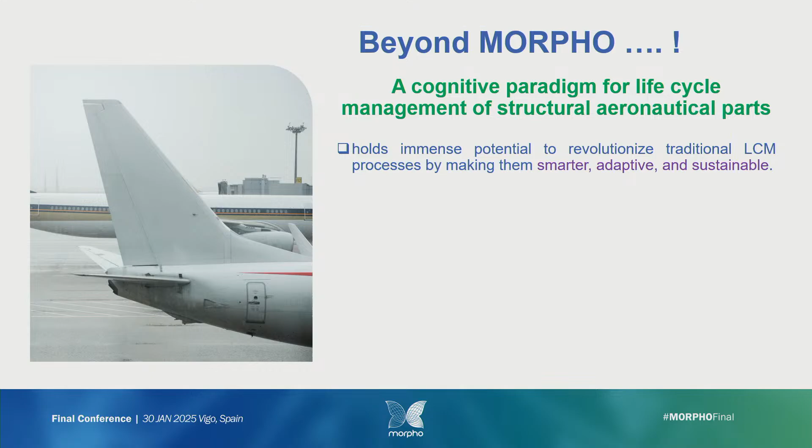So it's to go through a cognitive paradigm for life cycle management. Here it's dedicated to aeronautical parts, but can be generalized to all structures, typically all the composite structures. So why? It holds immense potential to go smarter, adaptive, and sustainable.

Digital transformation, specifically in aeronautics, is coming, and it's now. So there can be this approach of cognitive LCM, which provides strategic advantage by enabling systems to think, learn, and improve. It takes advantage of extraordinary sensors.

High-end computing power, increasing, offers transformative potential for aeronautics, for sustainability and efficiency, safety, and can achieve breakthroughs in environmental impact and cost effectiveness. This is linked to this approach.

So what is the advantage of that? What is the cognitive paradigm? It's a framework that integrates cognitive process, data-driven, and adaptive learning. It supposes the availability of aircraft sensors, data, and simulation. This is what we did in Morpho, what we are doing in lots of projects here, but it's a generalization that we're trying to bridge to the industry.

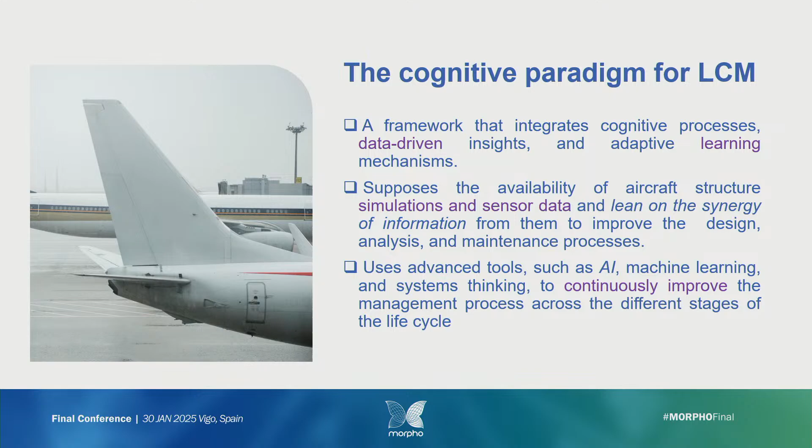Use advanced tools like AI now, machine learning, that will make the system think by itself, continuously improving the management of the process across the whole life cycle.

So some advantages: safety, it's evident. If you have something that thinks by itself, we can do some RUL estimation online, so we can be proactive, reducing the risk.

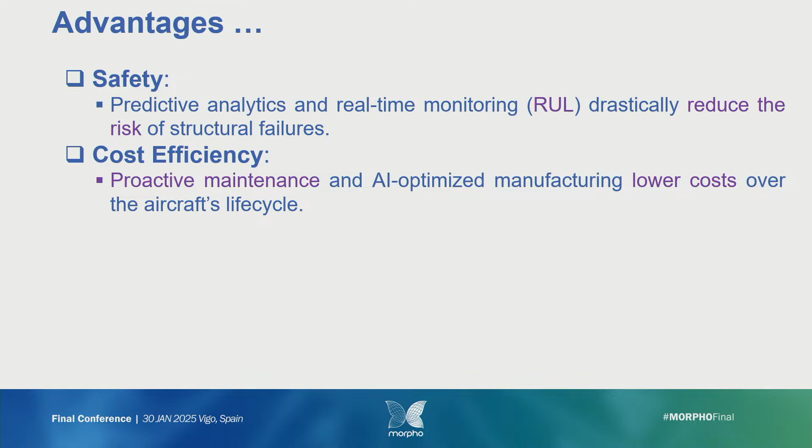Cost efficiency, for example SAFRAN: proactive maintenance, so less shutdown of the structures, so lower cost over the aircraft life cycle. Sustainability, of course, improving recyclability and life cycle feedback, minimizing environmental impact. And innovation: with AI we will accelerate the conception, the development, and improve reliability.

So I'm not going to try to convince you, as I said, because you are convinced about that. So some challenges: sensor integration is still a challenging issue. We did something here with Morpho, but it still needs more projects, more effort from scientists and also from industry to bridge what we did in labs to higher TRL.

Why? Because this is... okay.

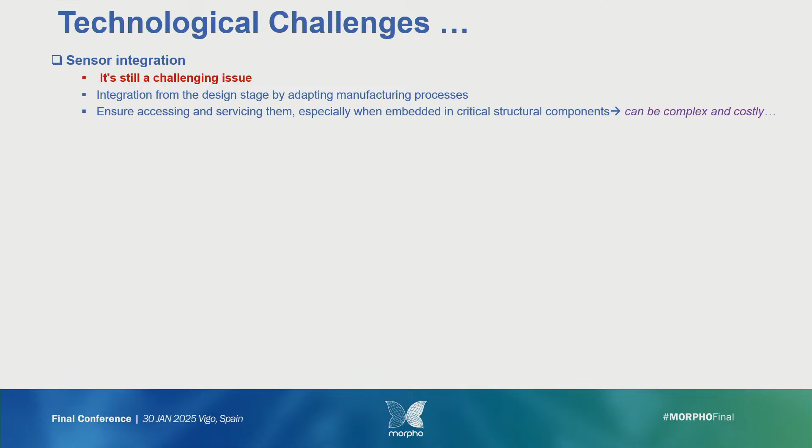So it's still a challenge. And then we have data integration and assimilation. I think we have some colleagues here that work on that. It's really a hotspot to do assimilation, how we can have all this data coming from different sources and how we can mitigate them, fuse them. Because you measure different data coming from different types of sensors, and you have the simulation one too, so you have to merge everything. It's really a challenging issue scientifically, with different methods needed to do that.

AI is now, we live with AI now. We cannot do something without taking into account all this power coming from AI. But relying on machine learning models, they may be prone to inaccuracy if trained insufficiently. So we need data, we need a lot of data. A prediction of some rare events can require expensive computational efforts.

Digital twin complexity: the digital twin is a word that we all like, but when the system is completely complex, it's not easy to have a digital twin that takes into account all the parameters, all the environment, and it requires really intensive resources. So simulating dynamic loads, material degradation, environmental effects in real time, it's not easy. We don't know how to do it now for some really complex structures or environments.

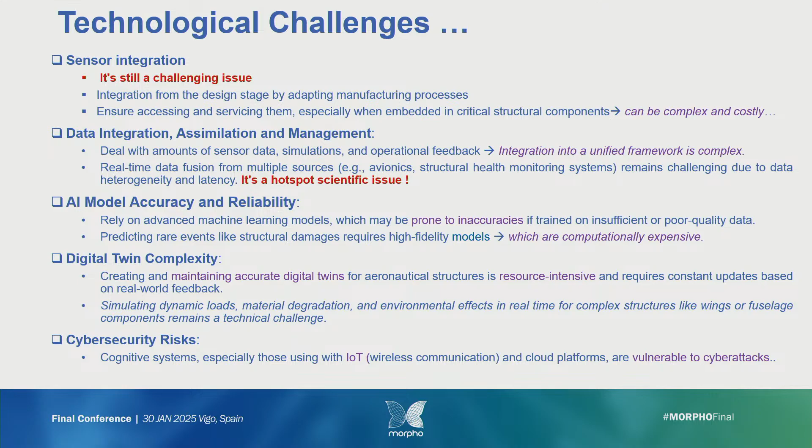Or you have to consider that wireless communication is a question of frequency bandwidth. Some are restricted, so yes, and it doesn't have to disturb other aircraft communication. That's also for cybersecurity risk and attacks. Okay, now some operational issues or challenges: we have the implementation cost, which needs significant investment and infrastructure from the aeronautical industry.

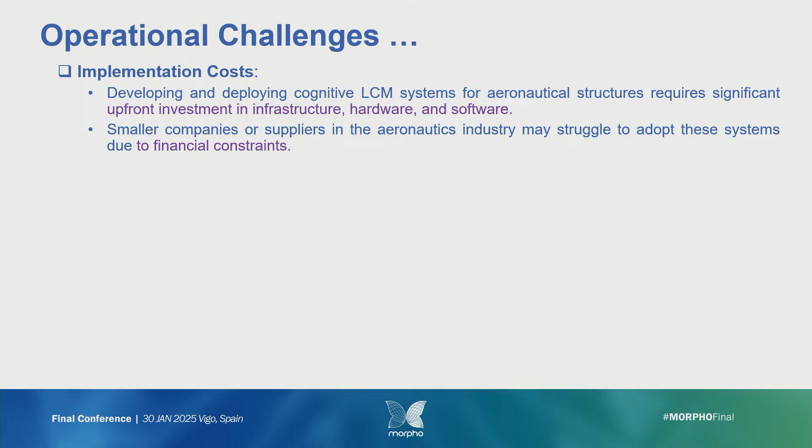It's not something that you can plug and play. It needs really hardware and software investments. It can be an issue for some smaller companies because you need this financial constraint. They can face this financial constraint and then block the system.

You have also the system maintenance and scalability. Cognitive systems require ongoing maintenance, update and scalability to handle increasing data volume. You need also to adapt the system to different aircraft, and this is not a generic way. You cannot adapt as you want, even if theoretically we can say we do some approach based on hybrid twin,

we can then transfer it to everything, but it's not the case, it's not easy. Interoperability with legacy systems. We say that we can exchange data, but in some industries there is sensitive data, and there is no data exchange. We say that data are the business, not data exchange. So this can make some constraints on this kind of approach.

Also issues from certification challenges, which is really a big challenge. We have EASA with us today, with Elena, so it's something that EASA is working on. It's not easy to certify for aeronautical parts all these technologies. So adding AI-driven approach, it's more complicated to certify. You will have really a challenge to go through this certification for AI-driven systems.

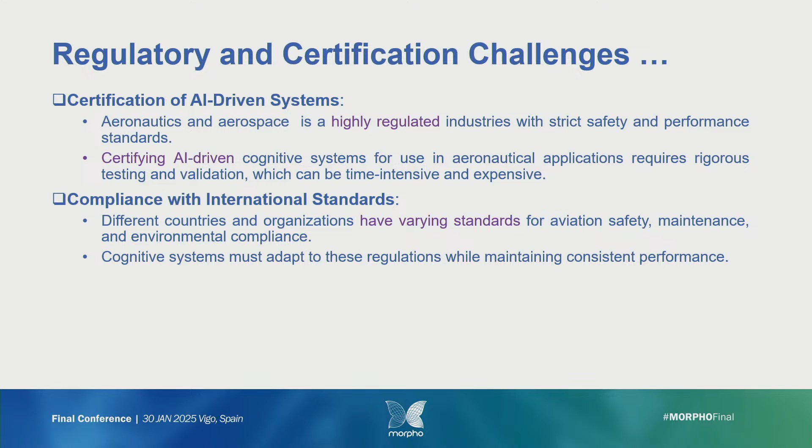Compliance with international standards - I think EASA is working on that with some others, like Aerospace Federation, to have some standards. But we don't have common standards now, until now. So when we will add AI, it will be another problem. And also the responsibility - who is responsible if there is any problem.

And one of the issues is human. We speak about AI, but it's human. It's really the challenge we have to trust in AI when it's embedded in the aeronautical part.

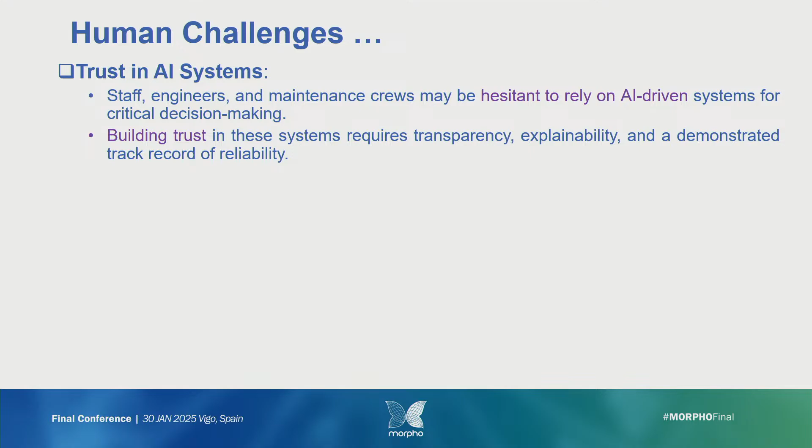We have also to skill the gaps, because implementation of management cognitive systems is specialized. You need more specialized engineering, researchers, and PhD students, stuff like that. It is not the case now. You have to go through this whole transformation of skills to take into account all this technology that goes around this cognitive approach, and human collaboration between human and cognitive system.

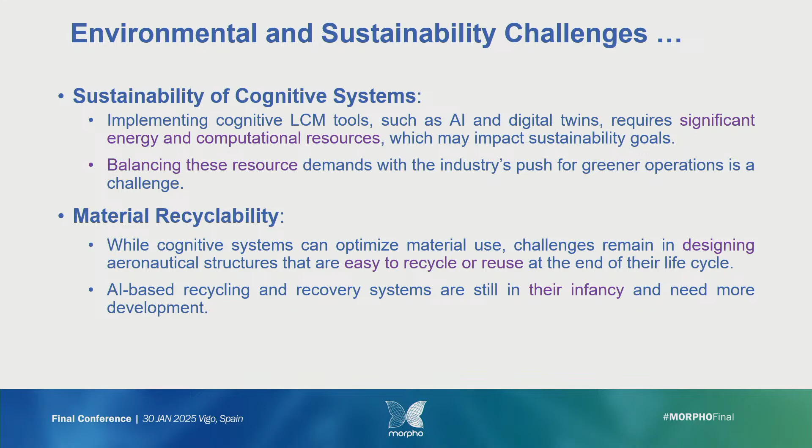And the last part is also on environmental and sustainability challenges. I think we all agree on this, because you have to do a balance between the computational efforts that we need for these hybrid twins, this digital approach, the cognitive approach, and the environmental impacts of it. You know, when we ask ChatGPT, you need a lot of energy. So it's something we have to be aware of. We cannot do what we want without balancing this resource.

And the recyclability of materials - we have to think about that from the beginning, from the conception, from the design, to have something that's easy to recycle, to reuse.

And at last, ethical and social issues. This is general stuff about AI models, not specific to aeronautics. And the change in jobs, manual roles, reduced demand for certain manual roles, stuff like that. It's too tricky to do all this. We are in our lab doing a lot of high-tech stuff, but in reality, if you want to go to industry, you have to take care about all that.

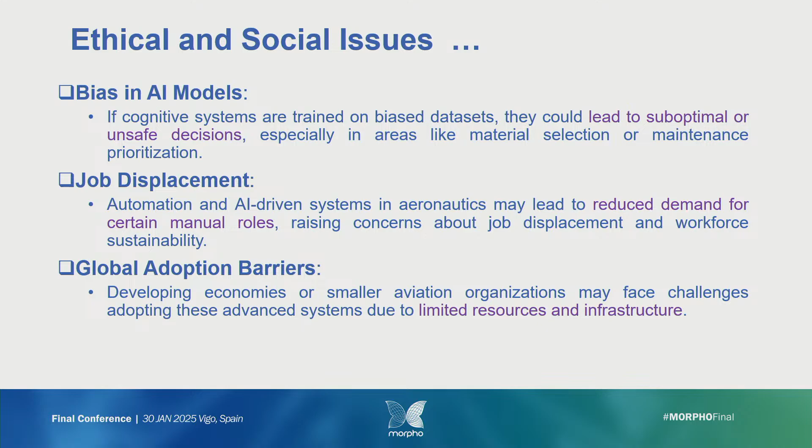So, to overcome this, we can think about what we are doing here in Morpho and some projects here, to sensorize from the beginning. Really, what we put, some sensors inside and on the structure. We have to do it from the beginning. We have to design new structures that integrate new materials.

You have new materials that have some properties without adding sensors. You know, you have new materials. Lots of work is being done now with some new materials that offer sensitive sensorization natively that can help with this paradigm.

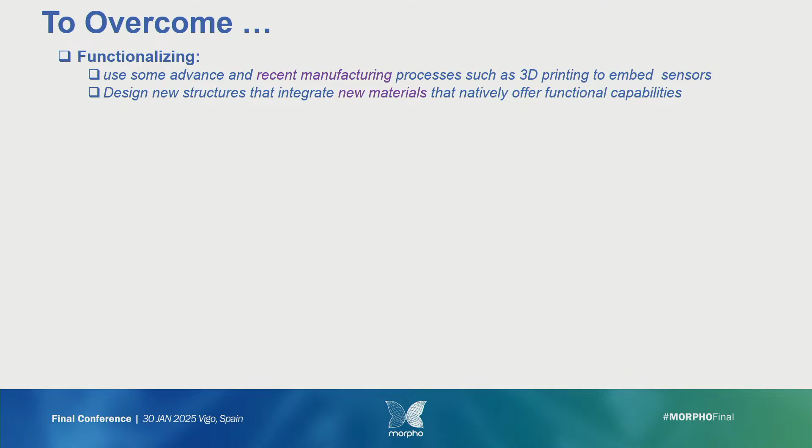Data and standardization. Advanced simulation testing. Invest in high fidelity simulation. It's vast, and it's not easy also, but incorporate some explainable AI to ease understanding of what's coming from this technology, and workforce development - develop specialized training programs and upskilling for the staff, and at the end, collaboration.

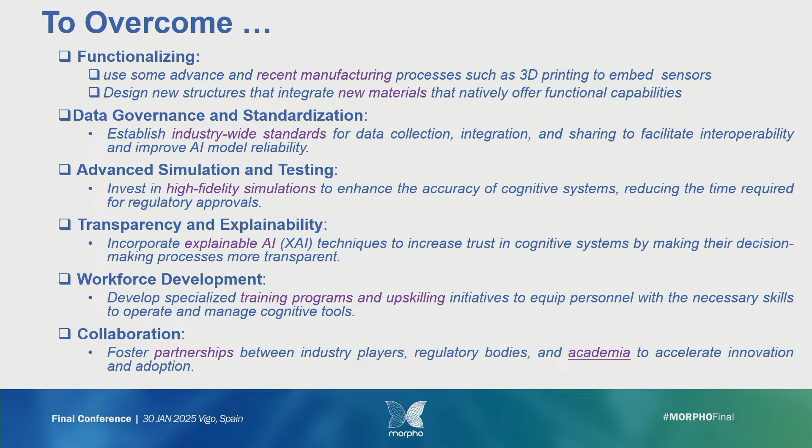What you are doing here - more collaboration between industry, researchers, and academia. Like Oscar is convinced, we have to trust us, or this researcher - we have to trust the researcher like Theo, Ludovic. We have to trust the researcher to be prone to help them, because we are here to help the industry get this kind of advanced technology that will help really go through a new paradigm for life cycle management. So I give the floor to Oscar.

Thanks, Nazih. Just to introduce myself, I'm Oscar D'Almeida. I work for SAFRAN Tech, the SAFRAN Corporate Research Center. We trust a lot in academia and research institutes, and we need more collaboration. Why not? Okay, I will make a short emphasis on what we call intelligent health and mission management.

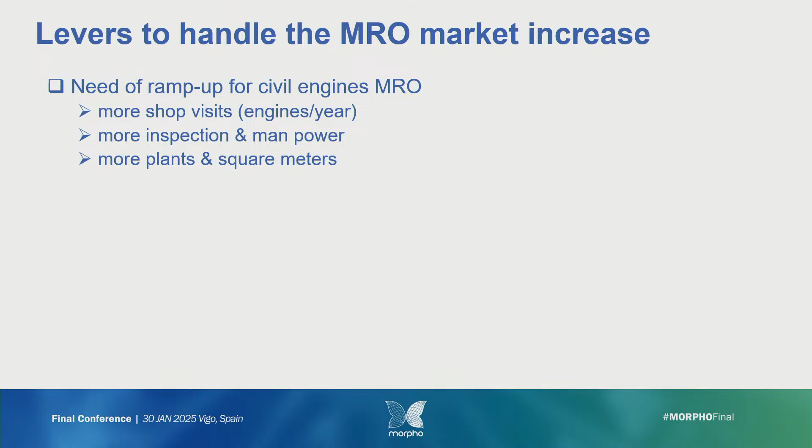And there's a necessity for innovation. That's why I was saying we trust innovation and collaboration with academia. And the new trend today is AI. AI everywhere, but you have to build confidence in AI. You have to demonstrate that you can trust the AI.

Spare part detection will be assisted by AI. You can use geolocalization, knowing where the engine is at any time, which is interesting to know the environment it has seen during operation or during many cycles.

You even go to automation of photo taking of the engine at repair stage. Visual inspection will be assisted by AI, and even the tools will be connected, meaning that when you're using the tool, you can register the feature of any configuration, every configuration, any part of the engines.

So this brings lots of data. There's a point I didn't mention: the storage of this data, needing more space, which is an environmental concern too, because of how to process this data. We're talking about reduction of CO2, but on the other hand, we're increasing consumption for digitalization. So it's a balance to strike between all of this.

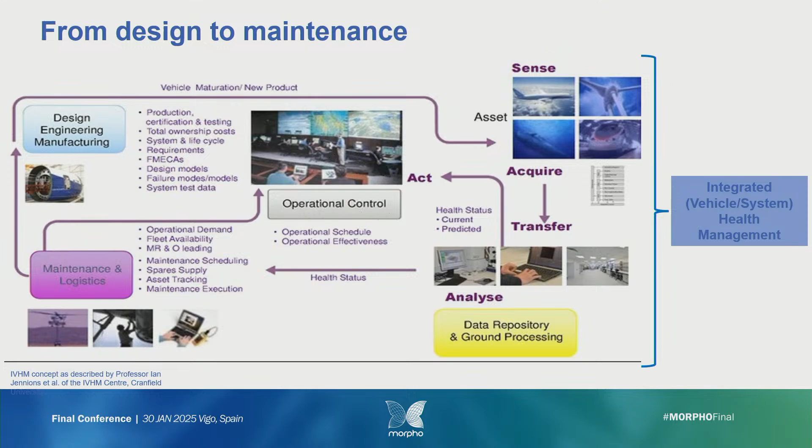So from design to maintenance, there has to be a closed loop between the design and the MRO part. You have to get information as operation starts, to give feedback to the design office about what's happened, what discrepancies or damage occurred, what problems you can face most or rarely, in order for the design office to optimize. It will be a continuous improvement toward optimization of the product. That's why we think integration of health management has to be done since the design step.

Once we say that, the unified capability of the system is to help assess the current system health and integrate that picture within the framework of the global operational demands.

So what are the aims of integrated system health management? It's to enable better management of vehicle and fleet health. You have many topics, but it's not new, I think you all know that. It will improve safety through the use of diagnostics and prognostics. It will help to fix faults when there's an issue, and give feedback to production, manufacturing, or design.

It will help improve availability through better maintenance scheduling, moving from unscheduled maintenance to scheduled maintenance, to reduce the global ownership cost, which is a big challenge today. Just as a figure, when you deposit an engine for maintenance, it's more than $1 million each deposit. So you can imagine if it happens too often, you are losing money.

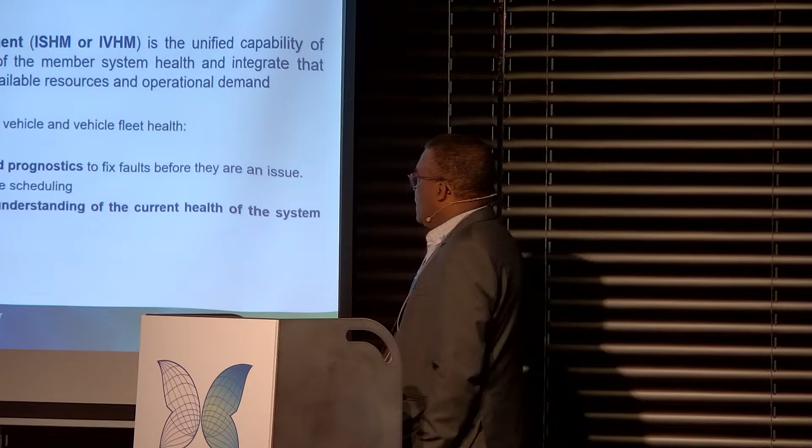You have to improve reliability and also the understanding of the current health of the system, and move to process-based maintenance. We see how we can help increase this understanding of the system and its current health. And the main and final point is to reduce the total cost of maintenance, because any unnecessary maintenance is decreasing your benefit.

The story of SHM. Do you know that the SHM concept is older than all of you in this room, I think? I'm not taking any risk. 1960. And as an old person, if you want to keep alive and continue moving, you have to adapt to the new concept, to the new environment. And this concept has been moving since 1960 to nowadays, and that's why we're coming to intelligent health and mission management.

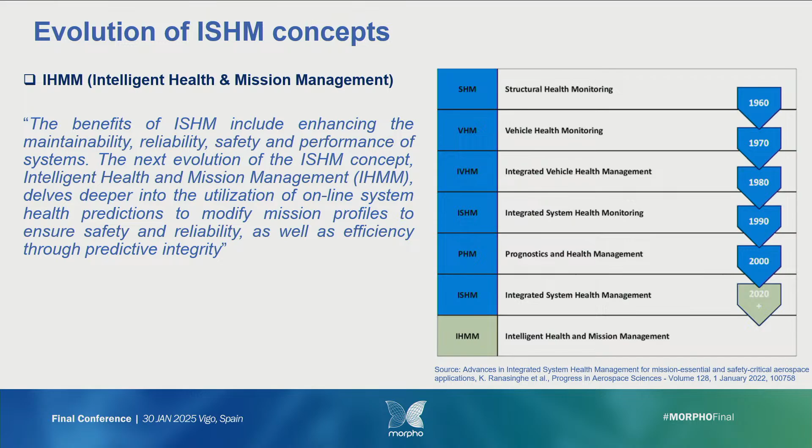So I just took the definition of what it is. The next evolution of the ISHM concept, intelligent health and mission management, delves deeper into utilization of online system health prediction to modify mission profile to ensure safety and reliability, as well as efficiency through predictive integrity. I think everything is said here. It's very generic, but you can choose what you want in this. If you want to improve the efficiency, the integrity, the reliability, and it showed that what we have done in the Morpho project are the basis of achieving this intelligent health and mission management.

So from MRO to support maintenance and services, it will ensure and maintain operational excellence for our customer, as we're increasing the capacity for maintenances to develop efficient means for assistance, inspection, troubleshooting, to provide more efficient maintenance operation, and reduce the turnaround time. Because when you stop, you spend time to check if there is no damage. This can take more time, and having this integrated system, you just have to come and plug and interrogate the system. You know the state. It reduces the time, and it will help to decide, to make the relevant decision.

So then we bring the maintenance requirement to design level for new equipment and systems. As we saw on the Morpho project, our technology needs to be embedded or integrated since the design. For an existing engine already in operation, it will be difficult to change. But for new development, it's the opportunity to be taken into account and brought to the manufacturer and operation. So we learn from experience in operation. We include support and maintenance system requirements at the design level. Then we can support equipment and system performance in operation. It will maintain or increase the same level of performance to reduce the environmental footprint of maintenance operation, which is a critical point.

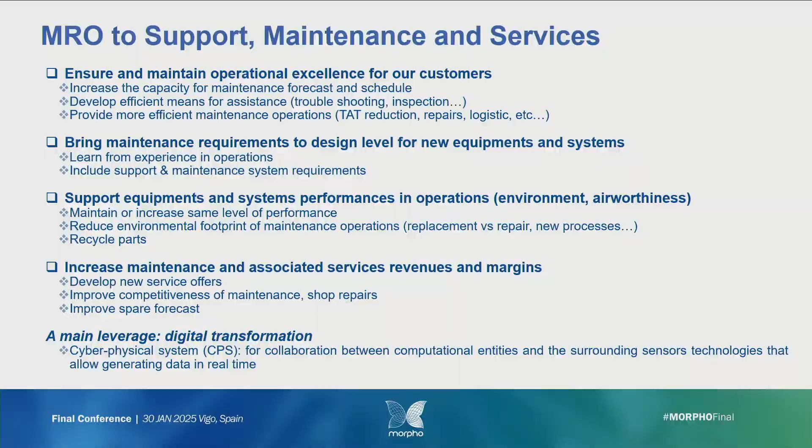And the main leverage for that is based on digital transformation. We all know that the collaboration between computational entities and the surrounding sensor technology generates data in real time, and real time is one of the bases to be more competitive. Is it time? No, but...

So why not digital twin? It will be a beneficial tool for the industry. The main criteria for digital twin - you have many definitions of digital twin, yeah - but this one I took from what we call Alliance Industrie du Futur, the French organization of all in the industry using AI. So it's an organized ensemble of digital models representing a real-world entity which addresses specific problems and uses. And the second part: it has to be updated regarding the real entity at a frequency and accuracy adapted to its problems and uses.

But at the end - oh, there's a mistake, a mix of French and English, sorry, I have to take off the S - the digital twin is provided with advanced exploitation tools which allow you to understand, analyze, predict, and optimize. That's where we come to the cognitive part. You have to understand what's happening, to analyze, and it helps you to predict and optimize.

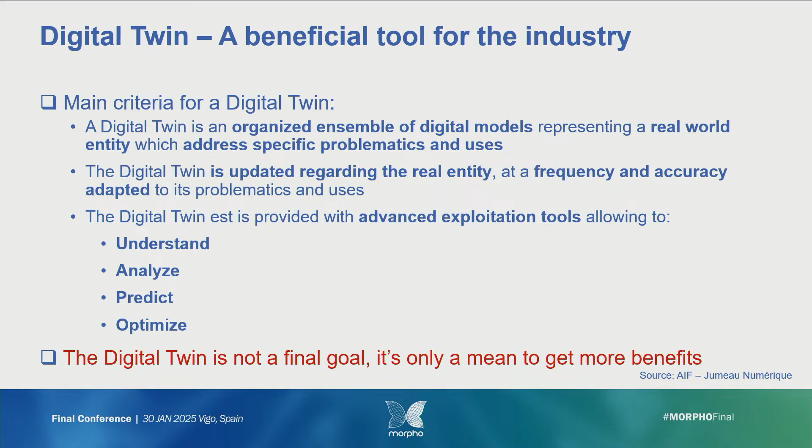If we come to a short representation of what it could help in, you start with the design and virtual commissioning. Nazih was talking about the simulation of testing. You can even simulate how you commission your system. You can optimize and manage the flight time. You schedule the maintenance. You improve the operator training.

It helps in disassembly. In the Morpho project we are disassembling and recycling. And one of the other parts is the supply chain and stock management also, because any problem of parts, if you don't know it in advance, it can block your product life for a longer time.

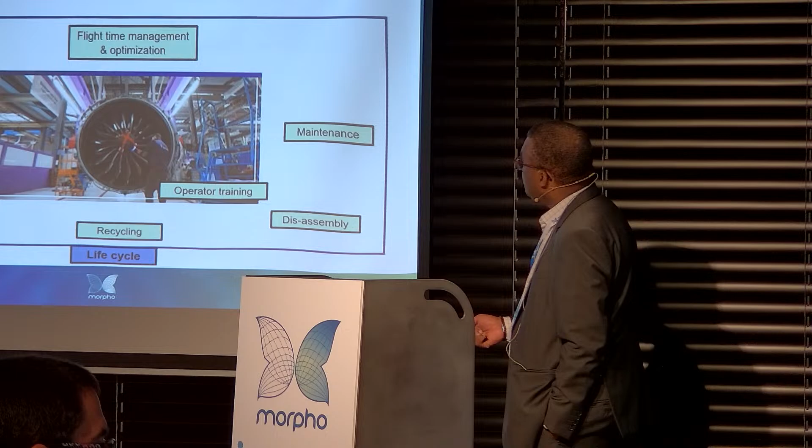So embedded lifecycle management with a smart multi-material structure is one of the ways for the industry of the future, for the future of the industry, and also for the future of the market, the aviation market. And as I said before, engineering, manufacturing and services has to work closely in a closed loop and a short loop, from sustainable design to recycling, and also to help for a sustainable aviation market. Thanks. Thank you.

It's not only giving figures and trends, you have to relate it to what we call physics inferences in the data analysis. As a user or as a developer? Both. But also as a user? Yeah, because if you give a trend with no explanation, we won't buy it. We need to know what's behind this. That's why it's called artificial. Suppose that you don't understand - can you understand, or can you not understand? That's the first assertion, but it's important for us to understand. If not, you don't master what you are doing. If data shows something happened, how do you correct that if you don't understand the physics? It's very difficult.

Elena: Also, it's important for certification. Yes, this is the point. So EASA speaks, it's actually the transparency behind the decision of an AI system - this is the issue. These are glass boxes, we say, or it's a black box. If we understand how the AI system reached the decision, this is what Oscar is saying. So that means EASA should certify the AI that you are using. We hope so. There is in Europe what we call the AI Act, which will be declined by EASA for aeronautics, and you have to prove the confidence you have in AI results for the certification.

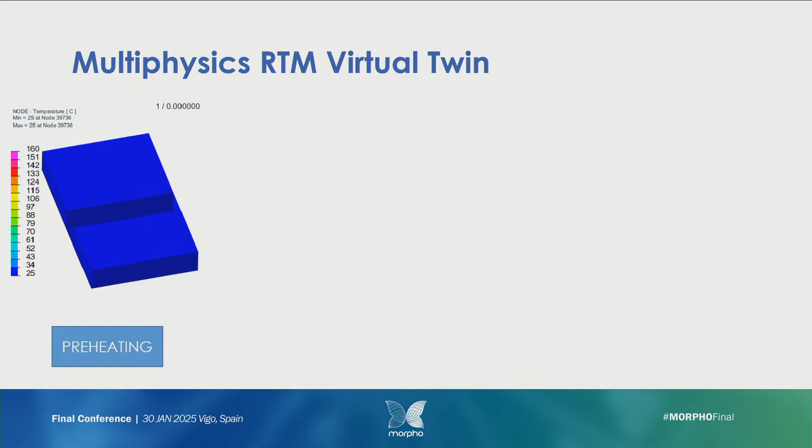So we develop a multi-physics virtual twin of this, which takes into account the pre-heating stage of the mold and cavity, then injection, the filling of the cavity with resin, after that the curing and cooling stage, and of course we also take into account demolding.

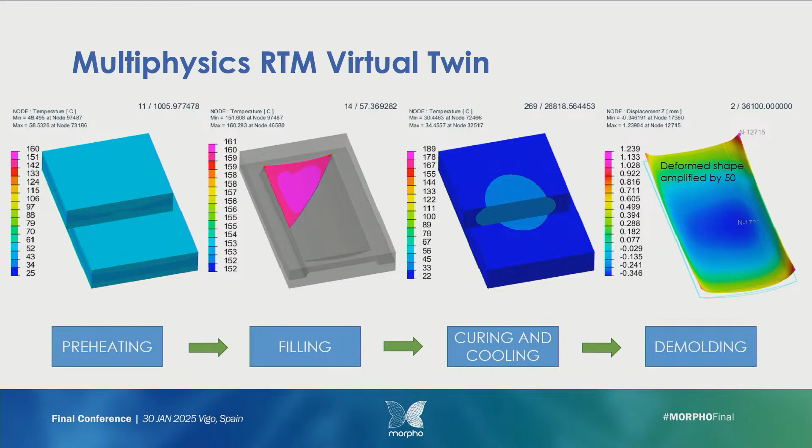Here, be careful, sorry. We amplify the deformation shape. So one simulation like that lasts around 5 hours, so we can't use this simulation to monitor the experiment, the process, in real time.

So we have to build a reduced model to be able to perform this simulation in real time. Here is an example of what we have done for predicting the filling time of the cavity.

We take into account parameters such as the permeability of the preform and the inlet pressure. We perform a design of experiments based on these parameters, taking 3 values of each. After all those simulations were carried out offline, we build a reduced model based on sparse proper generalized decomposition with 27 offline simulations, and we validate it with 23 offline simulations. The mean square error is less than 1%.

Of course, as the amount of data was too small, we use a cross-validation algorithm.

So here you have a movie of our reduced model, and just by moving the sliders here you can get the filling time of the cavity for 1 million combinations, nearly instantaneously—in milliseconds—so it's enough to simulate the process in real time.

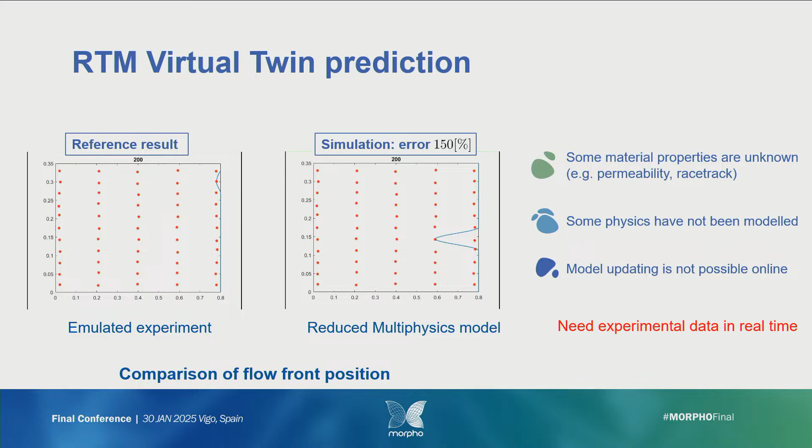And that's why we propose in the Morpho project to include some sensors, and Nikos will speak about these sensors. Thank you, Eric.

So I will show you only our part, the Synthesites part, which are mainly the electric sensors. But besides the electric sensors, we also used optical fibers inside the cavity to monitor the process, and afterwards used these optical fibers to monitor the structural performance.

So from our side, actually our technology has been developed from the beginning to be non-intrusive at all. We only touch the part from the mold, so there are no sensors or anything remaining in the part from our sensors.

And working closely together with SAFRAN Composites, they had developed a tool from scratch especially for Morpho. It's a simplified geometry of an FOD panel.

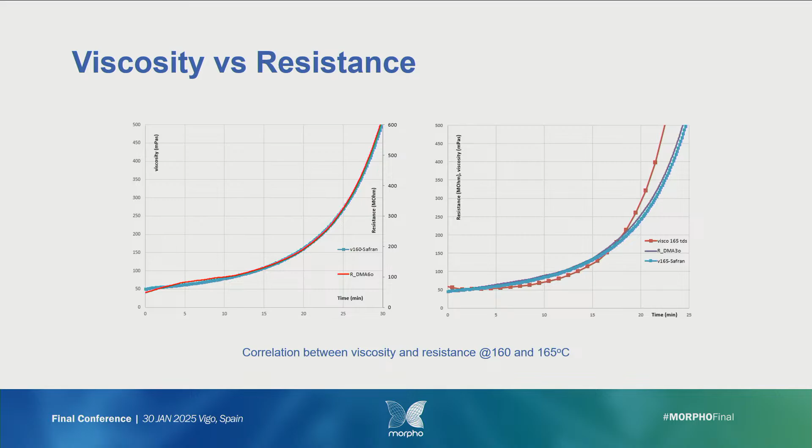Our Cure sensors measure electrical resistance and temperature of the resin. The electrical resistance is very well correlated to the viscosity of the resin, so you have a sensor inside the mold that can tell the operator or manufacturer the real-time viscosity. You can see what's happening in the resin inside the mold, and you can choose to change your cure cycle to take advantage of issues that may come up.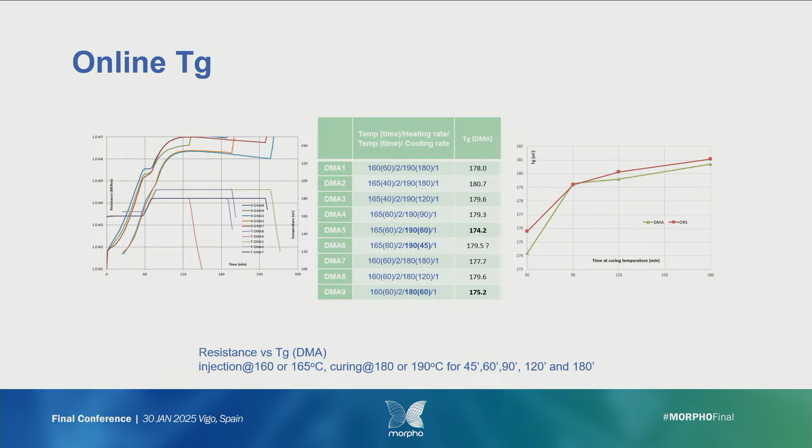We have also calibrated the sensors to provide the glass transition temperature in real time during manufacturing. That was also very helpful for the manufacturer to see the curing and end of cure, so they can demold and open the mold faster and sooner.

During the Morpho project, we did something like 10, 11, maybe 12 injections. There were also changes during the different injections with the optical fibers, so you can see that during these injections the flow patterns were quite different. I don't think we had even one real bad part, but there were certainly changes in the flow pattern which we managed to see with the sensors.

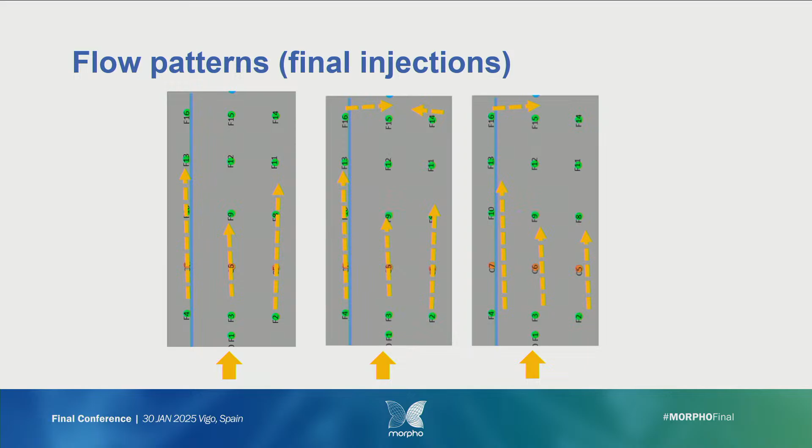These were the first injections, and these were the final injections, the last three. Also, we changed the cure cycle in order to optimize it.

We thought about changing different parameters of the injection, but the final trial of the system, in order to validate the performance and the improvement, was to inject at high temperature - the curing temperature - so there is no special step in the beginning to inject and then heat up for curing. The temperature was 190 from the beginning, for both injection and curing. In this case, SAFRAN managed to decrease quite a lot the curing time and the cycle time of production for the FOD panel.

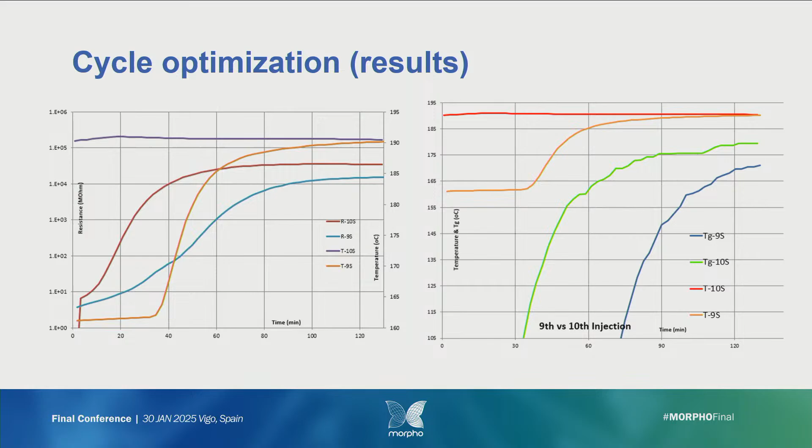Just to compare, these are the last one and the previous one. You can see the temperature in the previous one - there was a step here at 160, then heat up for curing. In the last one we just inject and cure at 190. You can see the development of TG in the different cases, and there was at least half an hour improvement in the curing time.

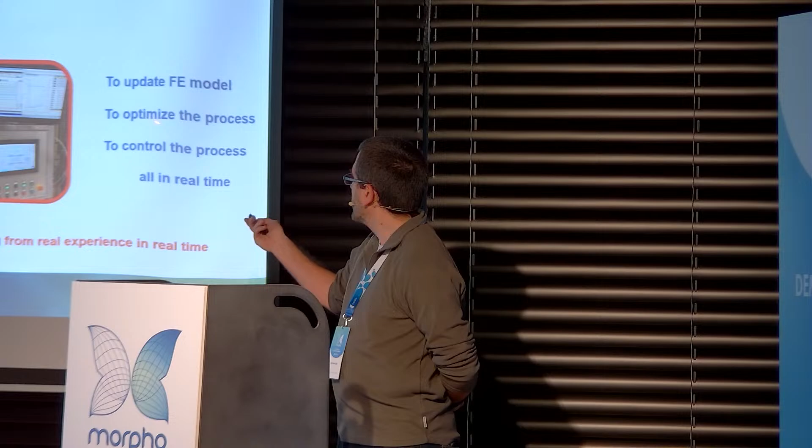So now we've integrated some sensors and know how they work, we can use them to improve our virtual twin. This is what we call a hybrid twin - a combination of numerical simulation based on physics plus data coming from the experiment. This hybrid twin is used to update in real time our finite element model to find the best material parameters that fit the real process. We can also use it to optimize the process, for example in the curing stage, and to control the process if we have actuators.

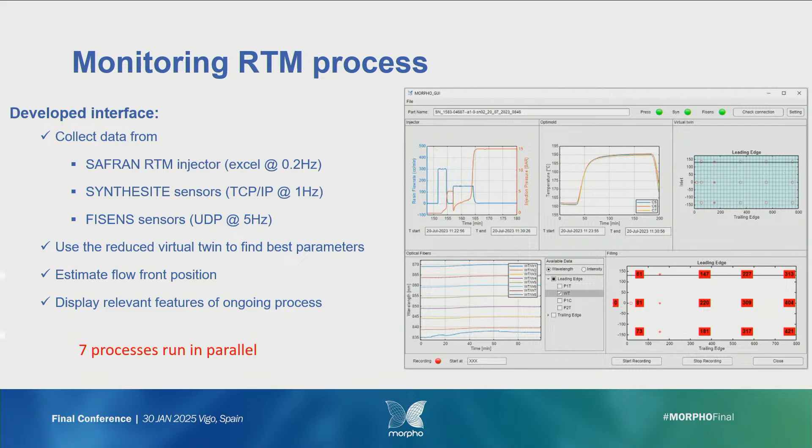To run it in real time during the process, we use parallel computing with 7 processes. With this, we can correct our model, but to do so we need to build what we call an ignorance model. Even with real data and optimized material parameters for our virtual twin, some errors remain, and to close the gap between prediction and reality, we train this ignorance model, learning from the first injections. Here we use the sparse proper generalized decomposition once again, but we can also use machine learning.

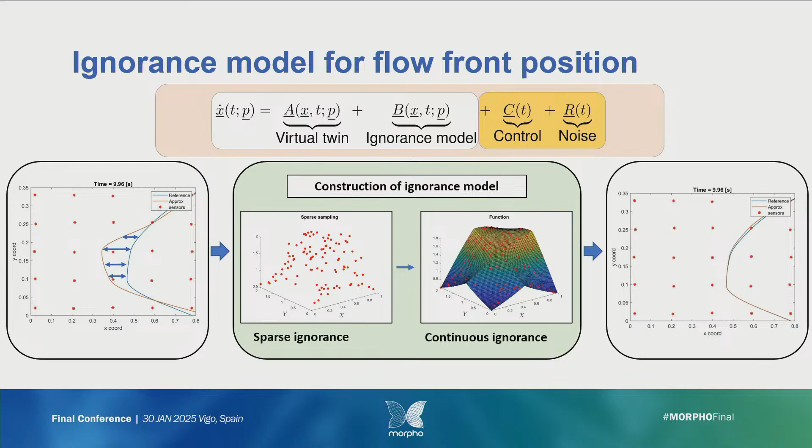With this ignorance model, we can well approximate and predict the flow front position during the experiment. So if there's one thing to keep in mind, the hybrid twin is just a virtual, numerical twin, optimized in real time, plus this ignorance model. But to build this, you need previous experiments and data from them.

We can also use this updated or optimized finite element approach to determine material parameters in real time. Here is an example of estimating the permeability of each zone of the preform. We developed an optimization algorithm, and here you can see that in real time we can estimate the permeability of the different zones based on data provided by the Synthesites sensors.

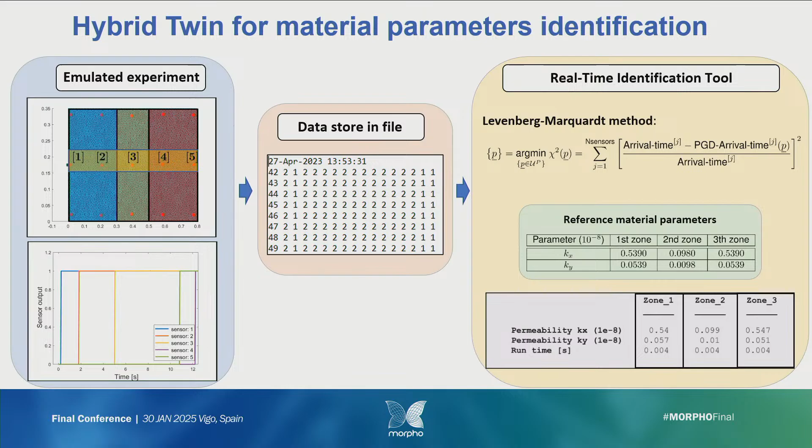However, we could not develop the control part because we have no actuators in the mold. We can't modify the filling during the process.

Just to ask, for the process monitoring, do you use only the carbon fiber Synthesites sensors, or also the signals from the FBG? What we present here, we only use data from Synthesites sensors because for all panels, fiber optics are not present in all fibers, all panels. So as we wanted to develop it for all, we only based our approach on Synthesites.

But as you will see in the next presentation, we can also use optical fiber to predict the resin arrival time, though it was not done here. I think the problem was that all the post-processing of the recorded data for the optical fibers was done afterwards, so there was no online software that could provide online information to the virtual twin.

Comments, remarks? Thanks for the presentation. I have a question concerning the optimization of the cycle time you managed to reduce. But if you inject at a very high temperature, I guess the viscosity goes lower.

Faster, so yes, it depends on the size of your part, you can do this. Do you plan on, or have you, let's say, optimized regarding different geometries eventually? Do you take that into account, or how would you include that in the design?

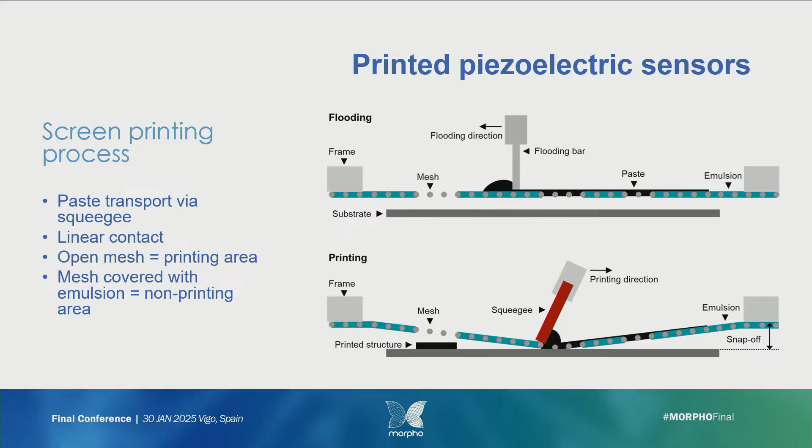To generate these sensors, we use a screen printing process. This is a very fast printing process. As you can see here, we have flooding and printing: we have a paste with the piezoelectric material, the mesh is flooded, and then it's printed by the squeegee here, giving you a printed structure on the part.

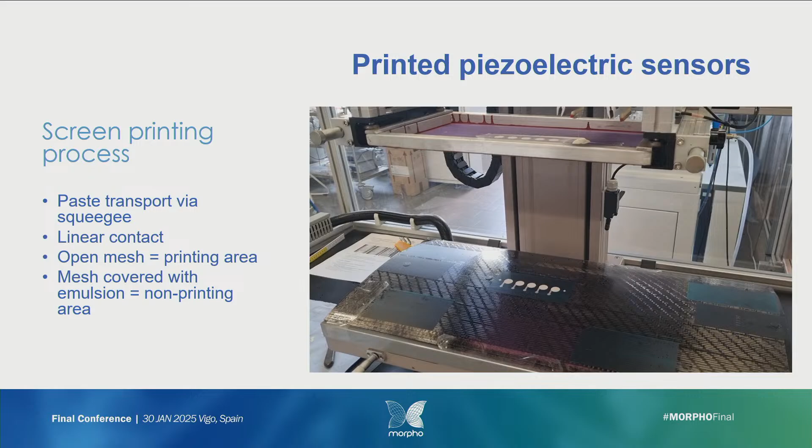Here you see the process itself, and it's very fast. You can see the flooding and then the printing process, and now the sensor is on the part. So it's relatively fast, and doing this we produce all these sensors on the surface of the part.

After printing, we need a polarization process because the piezoelectric materials are unoriented in the sensor. To get an orientation of the dipoles, we generate an electric field by applying a voltage of 350 volts at a temperature of 100 degrees for half an hour. Then all these piezoelectric dipoles will orient in the sensor.

After this, the sensors are able to detect local impacts when we have some impacts on the part. The signal can be detected and it can be calculated where the signal comes from. Mark will give some more information on how this works.

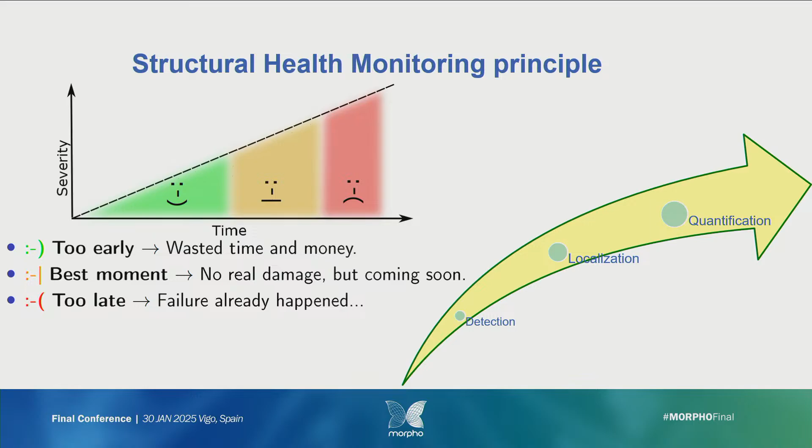Thank you, Ingo, and thank you everybody for being here. So the idea now that we have a new kind of sensor technology is to make use of it to perform structural health monitoring. Oscar started defining it, but the idea is to follow damage severity evolution over time, to know when we're in the orange zone and need to perform maintenance. If we do it earlier, it costs money for nothing, and if we do it too late, well, it will be too late. So when we speak about structural health monitoring, we have several steps to follow: first, detection, to know if there is damage in the structure or not; then localization, where is the damage; and finally quantification, how large is it. These are the steps we'd like to achieve using the printed piezoelectric sensor technology.

What can we expect from that? So we have several signal processing steps that we can achieve using piezoelectric sensors. At first, we can measure their electromechanical impedance. It's just the ratio of the voltage over the current at various frequencies. This is just an electrical measurement, but it allows us to know if the sensor itself is healthy. So this is the first step. We can just check that the sensor is working fine.

Then, as said by Ingo, and as you will see in the demonstrator, we can record impacts and know if there is an impact, where it has been impacted, and what is the associated energy. We can also do acoustic emission, which is a passive recording of damage evolution. Imagine during loading, there is a crack forming inside, and when it propagates, it will generate small noise that can also be recorded by piezoelectric elements.

And finally, we can use guided waves or lamb waves, which are guided waves propagating within the structure, and you can interrogate the material itself. So you send a wave, and if there is damage in the material, you will have a reflection of these waves by the damage, and then you will be able to collect information regarding the damage. So here, I will just highlight impact measurements and wave interrogation, but within the scope of the project we address all 4 technologies. What is very interesting here is that with one single sensor, you have access directly to the 4 underlying technologies and also to the 4 functionalities. So one sensor, but many possibilities offered by it.

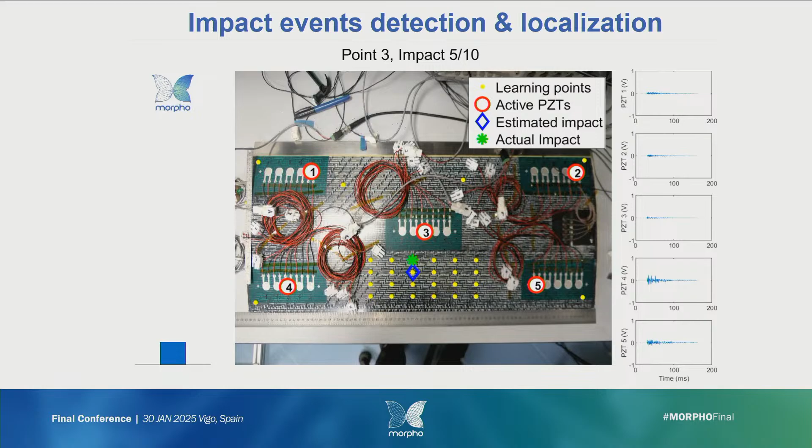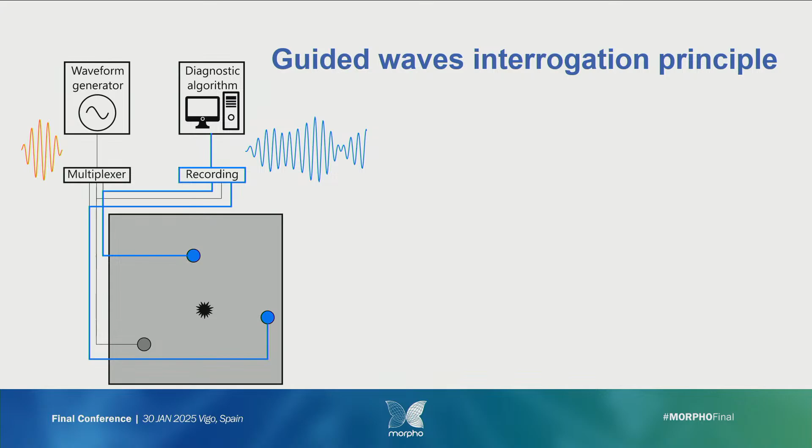So what we did is we sent regularly guided waves using regular piezo in the structures. And then these guided waves, when they interact with fatigue damage, generate an additional echo, and we are able to record it. And from a baseline recording and a recording in a damage case, we were able to isolate the damage signal and then conclude regarding the presence of damage.

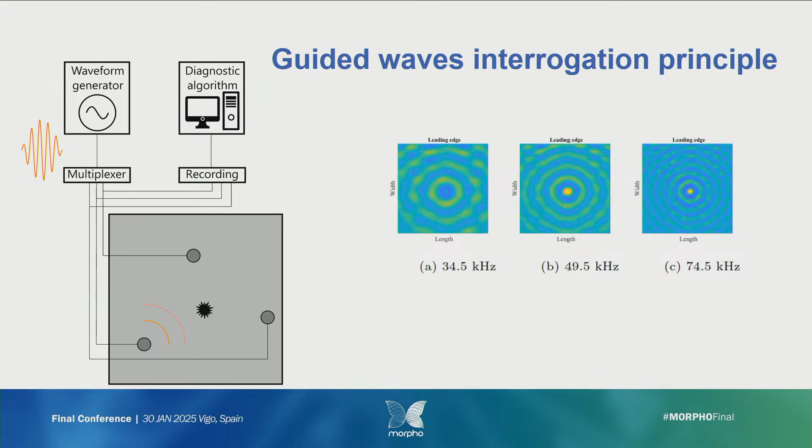But before that, we checked that we can also actuate lamb waves using printed piezo. So here you have pictures. We made measurements with a laser vibrometer around the printed piezo when we provide a voltage to it. And you can see that in that frequency range, with the printed piezoelectric element, we are able to actuate and send a lamb wave. So this is one good opportunity.

And for the damage monitoring procedure, we use the piezoelectric elements. We put that in a probabilistic framework, meaning that we made many measurements in a healthy state. From the measurement, we compute a damage index. Here it's just the energy within the envelope of the difference between two signals. And then we made measurements also after an impact has been applied on the panel. So it's an impact using a drop tower, damaging the panel.

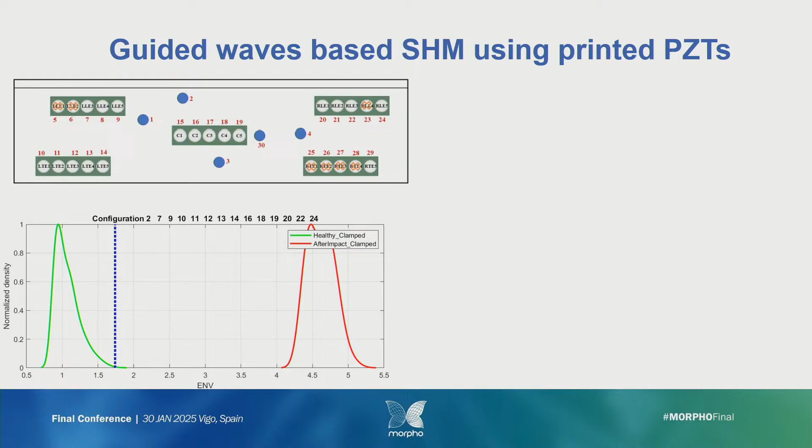And you can see that the damage index computed using printed piezo, so using a subset of the piezoelectric elements, we are able to estimate the damage location, which is here, and compare it to the actual location. So you can see that we have a small error, but quite reasonable given the complexity of the structure at hand. So we can actively detect damage, here an impact damage, and also localize it using the printed piezo.

So in order to summarize, we think that, and for us it's important to keep on working on that, because we have many functionalities to exploit.

So Ingo, yes, if you want to add some... Correct. I think we should give a demonstration.

Okay, so as Mark mentioned, you can use the hammer here and you get a signal here, and it's localized here, as he described. You can test it later for yourself. Yes, thank you for your attention.

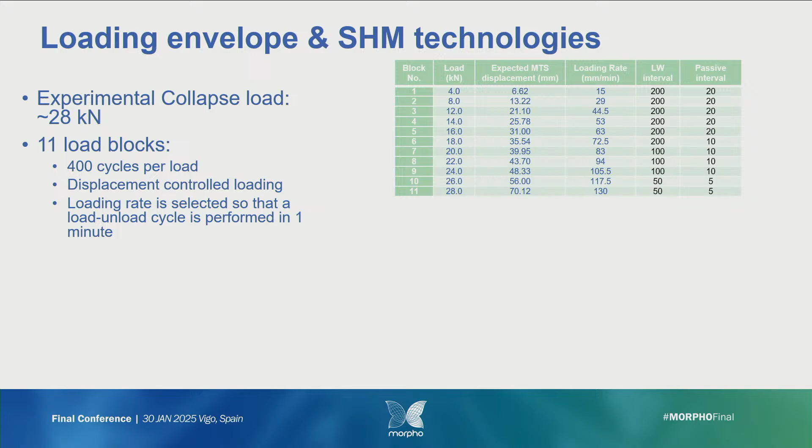Let me remind you again of the SHM technologies. We have strain sensors via FBGs on the FOD panels, an FBG sensor network, as well as printed PZT sensors and conventional PZT sensors of higher TRL, which we are more confident are working properly. After all, the printed PZT sensor is a very new, rather low TRL technology.

So we wanted to be sure that we have reliable guided wave measurements. We tested for many weeks, and in the following I will show you how we leveraged the strain data as well as the guided wave data, separately at the moment, to see what we can achieve in terms of diagnostics and prognostics.

Let me show you the pipeline, as we call it, the machine learning pipeline that we developed for handling the strain data. Starting from the structure, from the engineering structure, whatever this can be - in our case it was this FOD panel. It could be a wind turbine blade, or any other type of composite or metallic structure that is properly sensorized. You see here the strain, the FBG sensor, the fiber optic cable.

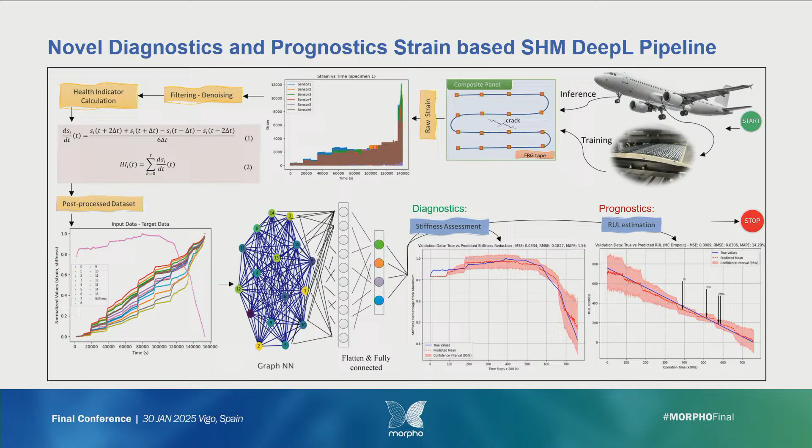Okay. We checked also what we could achieve with simpler architectures, like MLPs, simpler neural networks. And it was clear that the GNN, the graph neural network architecture, can on average score much better than simple MLPs. The reason we think this happens is that GNNs are capable of capturing cross-sensor relations.

So it's an ideal architecture when you have sensor networks and sensorized structures, especially for strain sensors, which are affected very locally by damage. And sensors that are far from the damage field are not as much affected by the strain perturbations induced by damage.

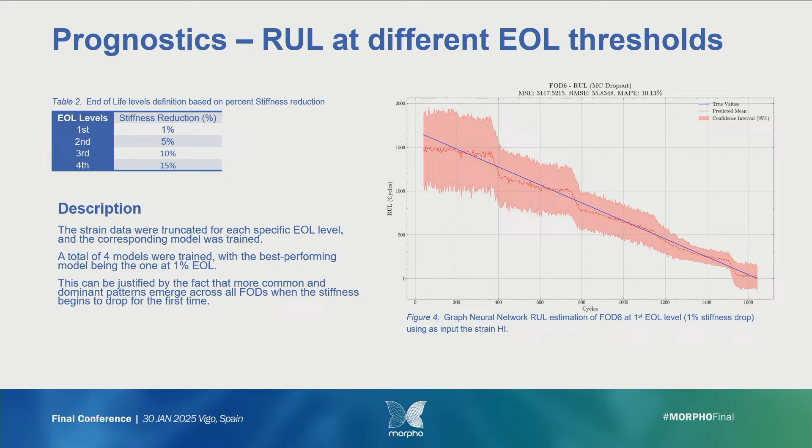Okay, the same for prognostics. Let me pass this through. This is the prognostic result for 1% stiffness drop, which was actually the best because it's easier to capture the performance before stiffness drops very rapidly towards the end of life. It's getting more difficult for the algorithm to understand this. But still, even in higher end of lives, you can see our estimates being quite close to the ground truth, to the blue line.

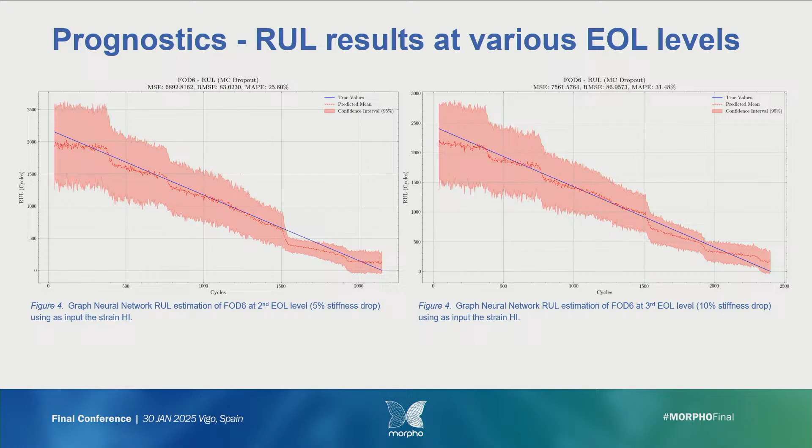So again, the red line is the estimate, the outcome of the machine learning algorithm, and the blue line is what we call the ground truth. And the confidence interval, well, interestingly enough, you can see that the uncertainty is narrowing, is closing, as we come towards the end, and you have more data and your algorithm is more confident in the result it gives you. This is also a good indication when you see the uncertainty decreasing towards the end.

Let me go to the next approach, where we want to leverage, to utilize guided waves data to perform the same task, diagnostic and prognostic. I will show you the prognostic part. The diagnostic part finished a little bit later, but it's in principle the same. The pipeline is similar. Out of a sensorized structure with the PZT sensors, we used only the conventional PZT sensors here, not the printed PZTs, as they are actually still under assessment. So we relied on the conventional PZTs.

We extracted the raw data, and an innovation that we used in this work is that we did not perform any manual feature extraction out of the guided waves. We inserted a big part of them, truncated to about 500 microseconds to capture the first part, the A0 or the S0 part of the guided wave, as inputs to another fancy architecture, a deep convolutional network called Inception CNN. It's called Inception from the well-known movie, because it has different layers of different kernels and different features, which is very interesting in our case because it performs what we call a hierarchical feature extraction.

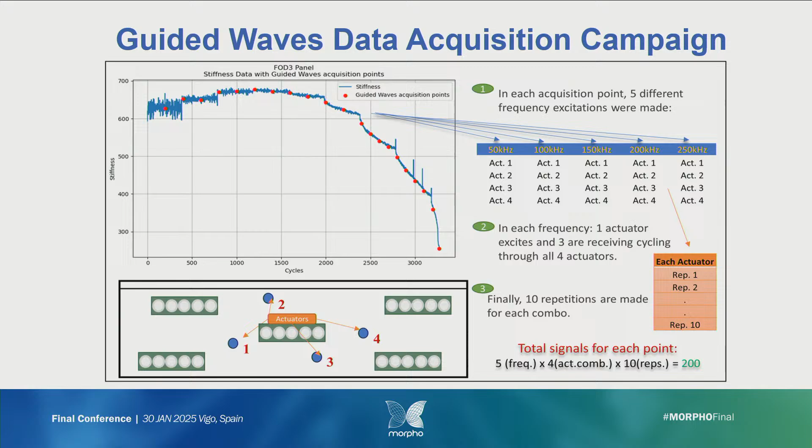We averaged to counteract some signal stochasticity that we observed here. We use time synchronous averaging.

We also tried, not only the inception CNNs, but a plethora of machine learning algorithms like transformers, Hilbert feature CNN, ResNet CNN, or even a simple multi-layer perceptron, a simple MLP. In most cases, and for sure on average, the inception CNN worked and scored much better in terms of root mean square error, keeping that as the performance metric. But for any other performance metric, the performance of the inception CNN was much better than its competitors. We believe this happens because of the hierarchical approach to feature extraction that this architecture allows.

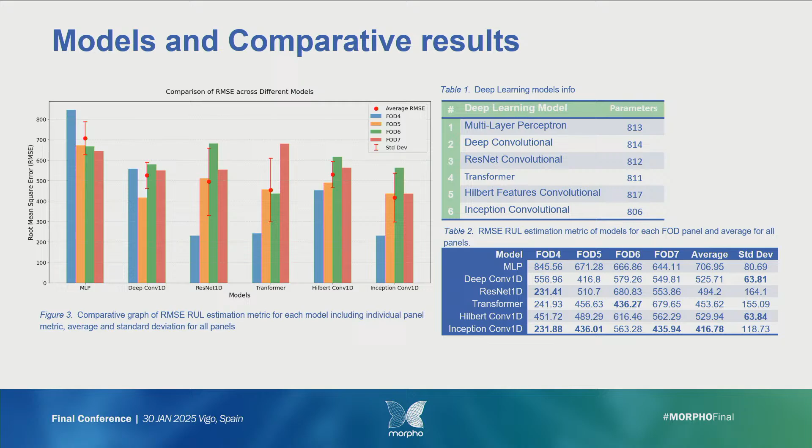These are the prognostic results for the best case. We also had some not-so-nice results, and it's very interesting for us to compare with what we obtained from strains. Actually, strain performed better, the strain-based algorithm. We are still discussing with colleagues why this is happening.

Another approach is to see what happens if we fuse both techniques, and I'm looking at Morteza because this was his PhD, to see if we can obtain better results than each one on its own.

You see, how is my time? Okay, so this means I'm already late. So let me pass you through quickly, sorry.

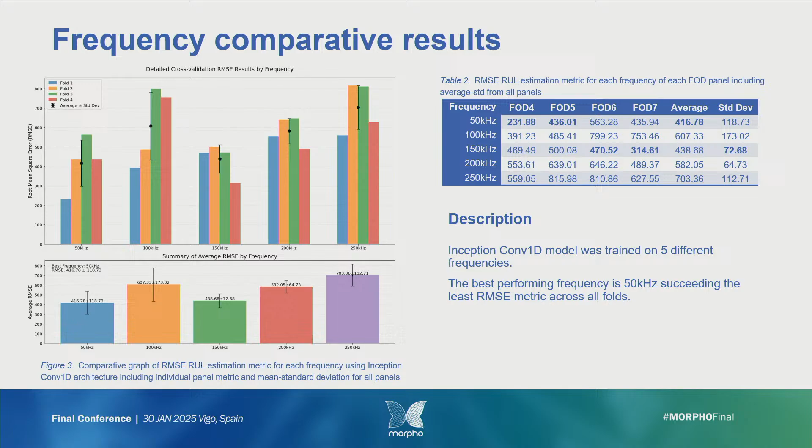We also assessed which frequency scored better, and we saw that on average the lowest one scores better, maybe due to lesser attenuation. Let me guide you through the conclusions.

We saw very good performance in stiffness reduction in the strain-based results, in stiffness reduction and RUL estimation, very good, with narrowing uncertainty.

Let me pass those quickly through. I want to stay in performance.

I don't have much time left. Let me just stress the importance, as I said before, of training and training data. If you have good training data, you have good algorithms, and you can do these things that in the beginning of the project seemed too ambitious, you can actually achieve and deliver. So what Morpho gave us was an excellent opportunity to perform these very elaborate and expensive tests and see that these concepts can work. They have the capability to work.

I will talk more later at the SHM roundtable this afternoon, where we will have the chance to exchange ideas. Thank you very much for your attention.

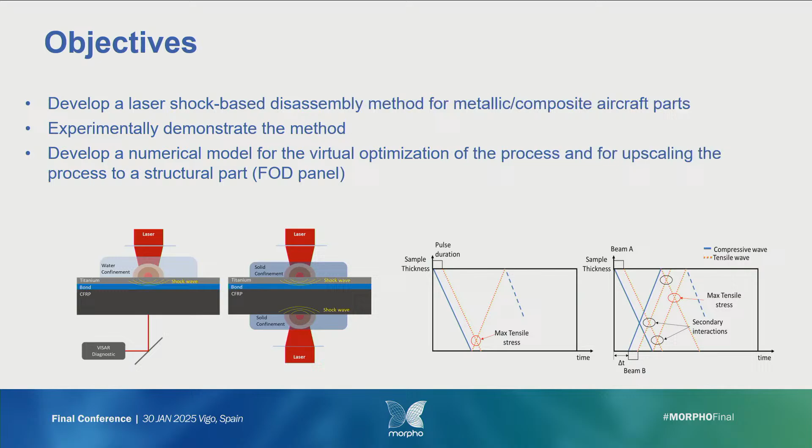At the end, we used the model to upscale the process at the FOD panel, because due to limitations of the number of panels available in the project, we couldn't perform laser shock tests on the panel. So this process has been performed entirely numerically.

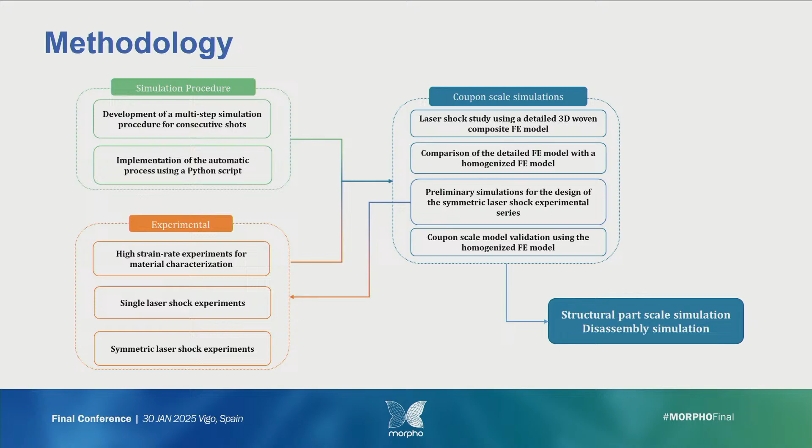This is a description of the methodology. We developed the model at coupon level, validated it, then performed some tests at coupon level in order to test the process, and then developed the model of the FOD panel, and managed to demonstrate the applicability of the method at a large scale.

At the coupon level, we developed a small FE model comprised of the metallic layer, which initially was made from titanium, then changed to stainless steel. This metallic layer is adhesively bonded to the composite core.

By performing laser shock simulations, with the spot at the middle, we investigated and optimized the process in order to break the interface between the top layer and the composite skin, and to finally achieve debonding.

In the model, we don't simulate the laser or the process of creating the pulse, but we apply a pressure profile computed from the laser simulation, applied on the top surface of the model using a circular spot. Here you can see how the pressure profile is distributed in the circular spot.

For the model, this is a dynamic simulation, a shock wave propagation simulation, caused by this pressure profile.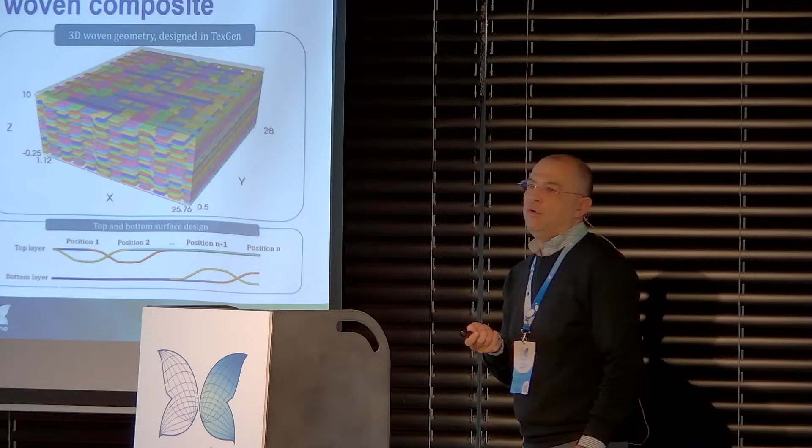The composite skin was made of a complicated 3D woven material, and in order to obtain the detailed properties needed for the simulation, we performed a multi-scale simulation in which we developed a detailed FE model of the 3D woven material at the micro level, and we loaded this RVE, this representative volume element.

This was done in order to obtain the different mechanical properties of the composite material, elastic properties and strengths. The purpose of this modeling approach was to go afterwards to a homogenized FE model, because we couldn't use this detailed FE model in the specimen and the FOD. Instead we used a homogenized FE model, in which we considered the properties computed at the detailed level.

These are the two specimens which were used at the coupon level for simulating debonding due to laser shock. You can see here a few details of the model. We considered the material model of Johnson, Cook, and Gruneisen for the titanium.

We used cohesive elements to model the bond line and simulate the bonding. For the composite, we used MAT162, a material model that considers progressive damage modeling in LS-Dyna, in order to be able at the same time to compute damage in the composite core, because we wanted to see if the composite material is damaged during the laser shock process.

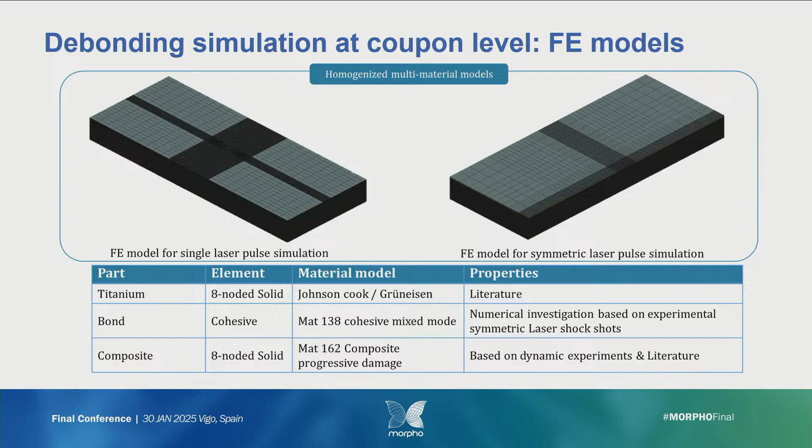In this video, you can see how the laser shock causes the wave that propagates in the specimen. We have, of course, the development of release waves as well. And the interaction of the release wave with the primary wave is causing the tensile stress field that leads to debonding.

Okay, so at coupon level, we performed also tests, as mentioned before, and we have detected debonding using microscopy. You can see here the area where the adhesive, which is this yellow layer, and this is the titanium layer. Here is the area of debonding and how this area propagates. You can see here the measurement of this area.

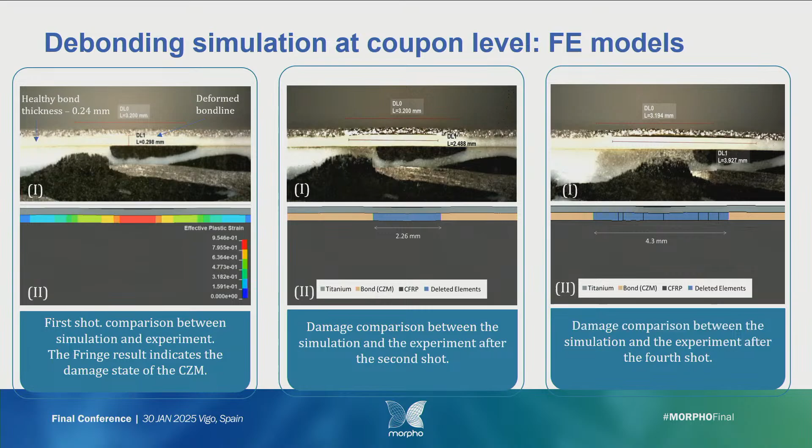And we have compared these experimental measurements with the numerically predicted debonding in terms of debonding length. We have managed to achieve a very good correlation between the model and the test. This was a very good validation of the model, and this gives us also the ignition to proceed to the model of the FOD panel.

For the FOD panel, things are more complicated because we want to fully debond the metallic protective layer, which is curved at the leading edge. This means that we need to debond first the upper surface and then the lower surface. In order to do this, we have developed a process in Python to apply consecutive laser shocks. We have also tested the symmetric laser shock configuration, which was proved more efficient.

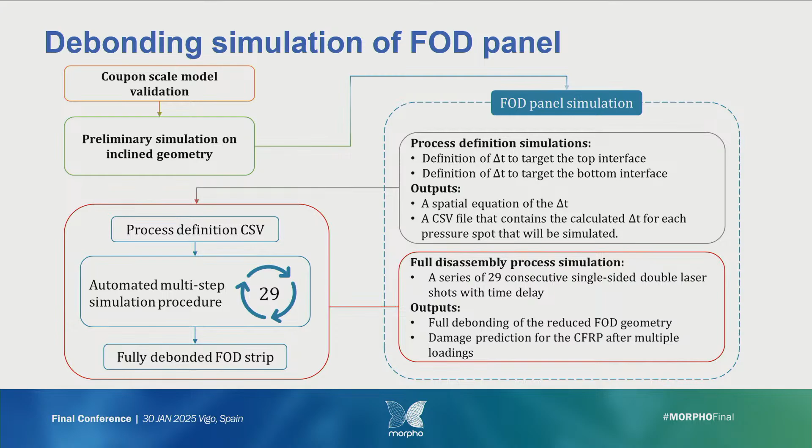So before proceeding to the debonding simulation at the FOD panel, we performed a parametric study in order to optimize the process and to be able to apply repeated shocks at different points of the FOD. You can see here a part of the FOD panel, and also the repeated shocks at different locations. These circles correspond to the laser's circular spot.

So as I told you, we have concluded that the symmetric laser shock configuration is more efficient in order to be able to fully debond the metallic protective layer.

Here you can see the results from load 1 to load 29. So we have 29 laser shocks. You can see here how damage is created with the colors moving from blue to red. Also, from load 1 to load 29, you can see the eroded, deleted elements, which correspond to the fully debonded areas. So we have managed to fully debond the metallic protective layer, except from the leading edge, the nose, which was very difficult to debond.

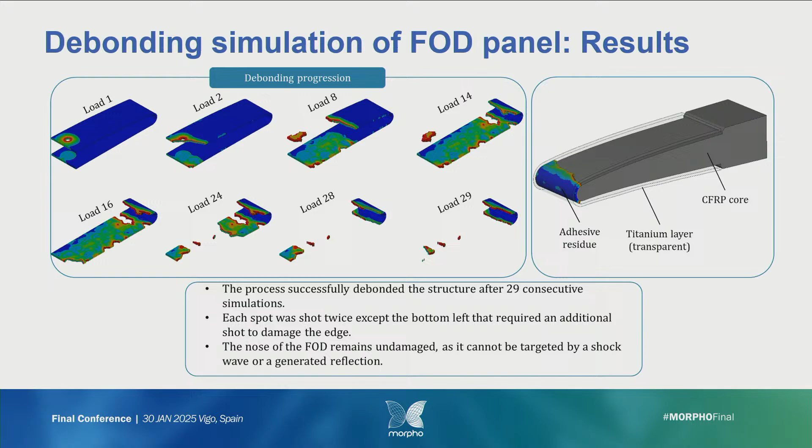So the conclusions are that we have managed to demonstrate experimentally that the method is efficient and can be used as a disassembly method. We have also developed a numerical model which has been validated and used at coupon level to optimize the process, and then this model has been used to scale up the process to a structural part. So the experimental process and the numerical model combined can be used for an optimized implementation of the process for the disassembly of structural parts.

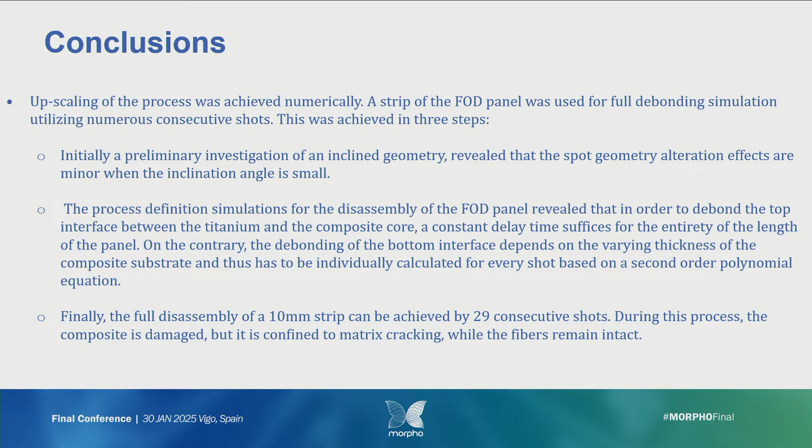Oh no. Okay. Then when the titanium layer has been removed, we are left with the CFRP, which is a carbon fiber reinforced polymer, and we must find a solution for the recycling of this material.

Maybe first of all, I wanted to give you a short introduction about Comet. In few words, Comet is a Belgian metal recycling family-owned company. We have two shredding sites located in Belgium. We recycle approximately 1 million tons per year of metal waste. We generate in turn a lot of what we call shredder residue. And we develop internally all the technologies with our R&D department that will be used to process the shredder residue.

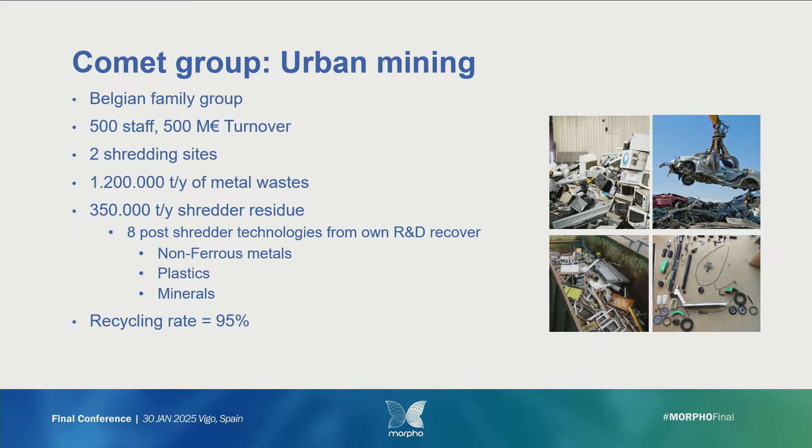We will have also mineral fractions, so that at the end, today we are certified to recycle at more than 95% end-of-life vehicles. But end-of-life vehicles is not the only input in our process. We have electrical scooters as well as electronic devices, or collecting scraps. And today the purpose is to find a solution for the carbon fiber recycling.

We identified that the most promising process in terms of industrial application is recycling by pyrolysis followed by an oxidation process, which is quite good because we have built in our plant a semi-industrial pilot demonstration facility for the pyrolysis of end-of-life shredder residue organic. The purpose of the project was to see how this process could also be applied for the recovery of carbon fiber.

On paper, this is quite easy to recycle carbon fiber. First of all, you need to pyrolyze the material at a temperature of approximately 500 degrees, which consists in heating the material without oxygen. In that condition, the resin which is around the carbon fiber will be destroyed. Then you have to oxidize the solid residue that you get after the pyrolysis to clean the fiber from the small particles of solid residue that still contaminate the carbon fiber.

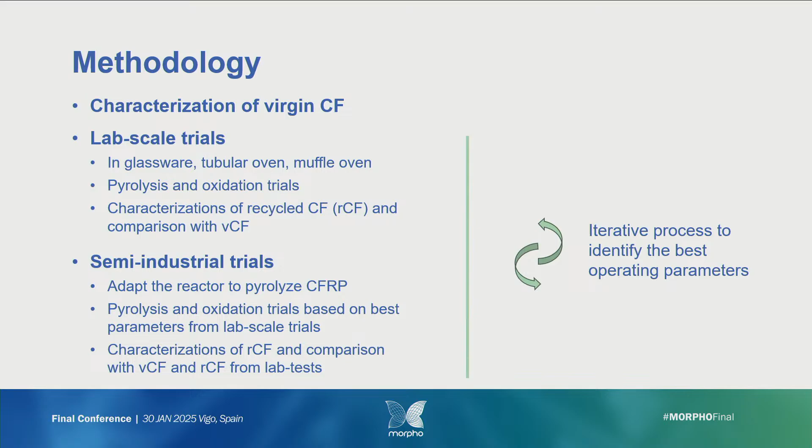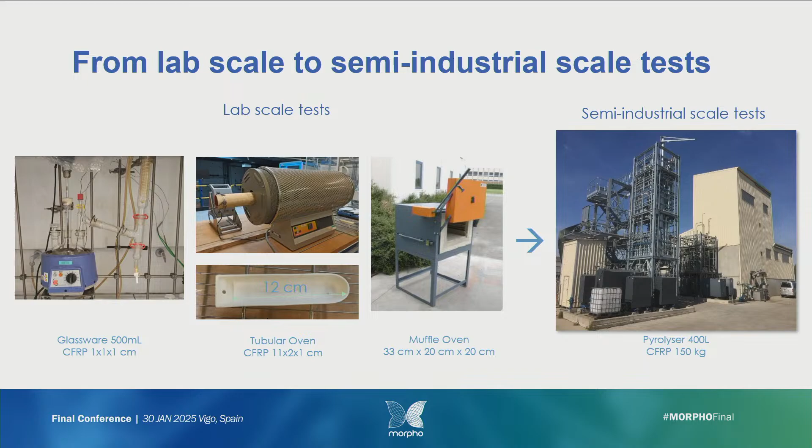This is all the experimental setup that was used. On the left, you have all the lab scale equipment, from the smallest to the largest one. And here, this is an illustration of the pyrolysis plant that we have for the final test. This pyrolysis plant has a pyrolyzer of 400 liters of volume, so it will require a large volume of carbon fiber to properly operate.

At smaller scale, the lab scale tests showed that the optimal parameters for the recovery of the carbon fiber was a pyrolysis of 2 hours at 500 degrees, followed by oxidation of 30 minutes also at 500 degrees, which is quite good because our machine is designed to work optimally at 500 degrees, and we do not have the possibility to easily change the temperature of the reactor between the phases of pyrolysis and oxidation. For production reasons, it's much easier to work at a stable temperature.

So the findings at lab scale are very, very good for, let's say, future implementation at a larger scale. And the degradation of mechanical properties is limited to 10% in that condition.

This is a detail of the mechanical properties that have been measured on the recovered carbon fiber. Interesting here on the picture is to see at the microscopic level the effect of the pyrolysis step followed by the oxidation. As much as you pyrolyze and oxidize, as much as you clean the fiber, but also as much as you degrade the mechanical properties. So you have to find a compromise. On the left, the virgin carbon fiber. On the right, the recovered carbon fiber.

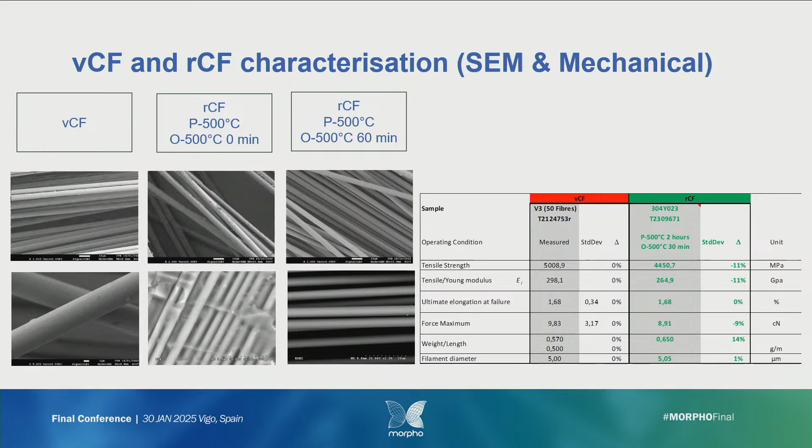At semi-industrial scale, once we found the parameters at a smaller scale, we implemented it at larger scale, and of course it's not that easy, because there are numbers of other parameters that must be taken into account. For example, the geometry of the material has importance, because the large-scale reactor doesn't behave like a small lab equipment reactor. Also, the heat transfer is not the same.

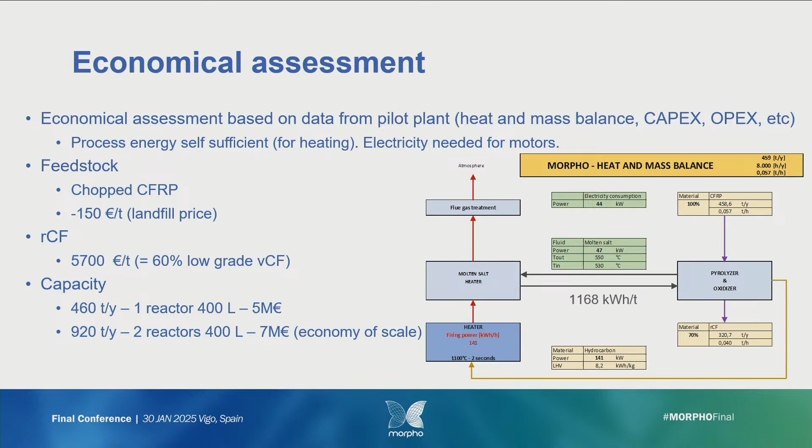Also in terms of capacity, today the aviation and aerospace sector, including defense, produces approximately 6,000 tons per year of waste in Europe. So if you want to make a plant for 1,000 tons per year of waste today, I think it will be difficult, because we also have to guarantee the supply of this material, and to supply material of good quality, not too contaminated by other products than carbon fiber.